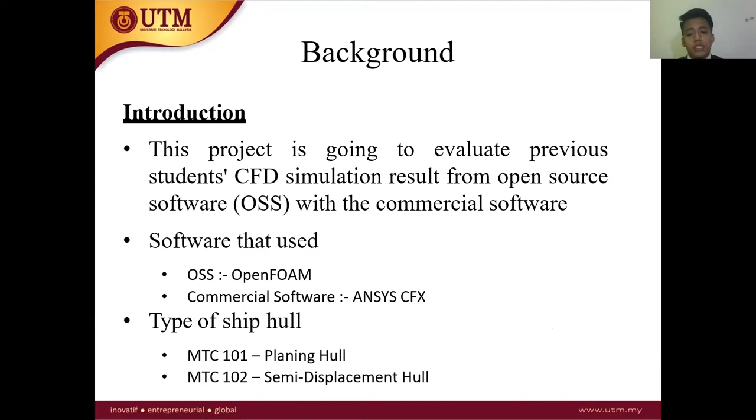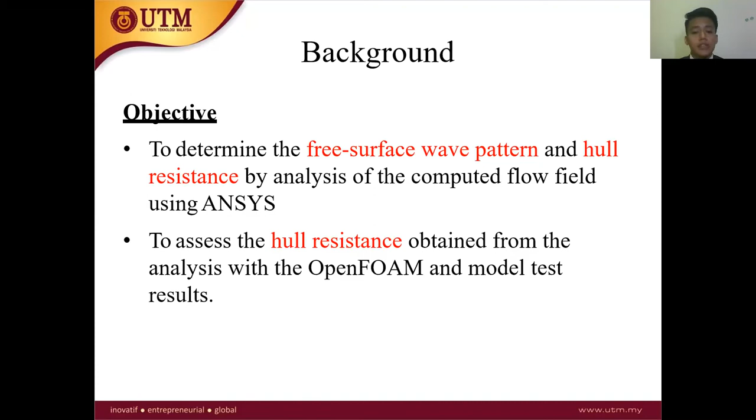The objective is to determine the free surface wave pattern and hull resistance by analyzing the computed flow field using ANSYS CFX, and to assess the hull resistance obtained from the analysis with OpenFOAM and the model test result.

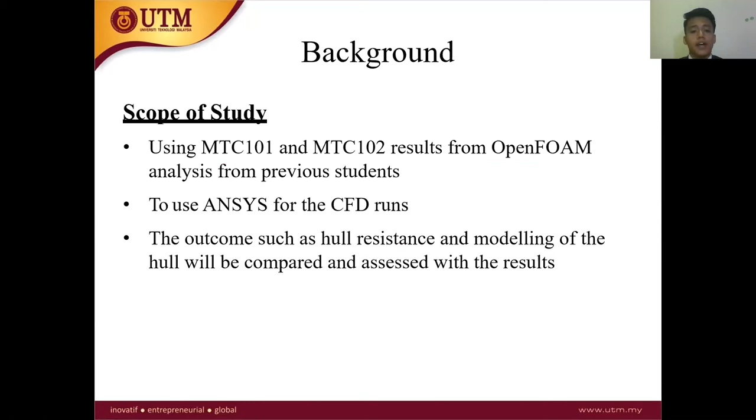My scope of study covers using MTC101 and MTC102 results from OpenFOAM analysis from the previous student, to use ANSYS CFX for the CFD run. The outcomes such as hull resistance and modeling of the hull will be compared and assessed with the result.

The problem statement is firstly, what is the better platform of software to make an analysis of free surface wave pattern and hull resistance, either commercial software or open source software. Second, how much is the difference in terms of accuracy between commercial software and open source software.

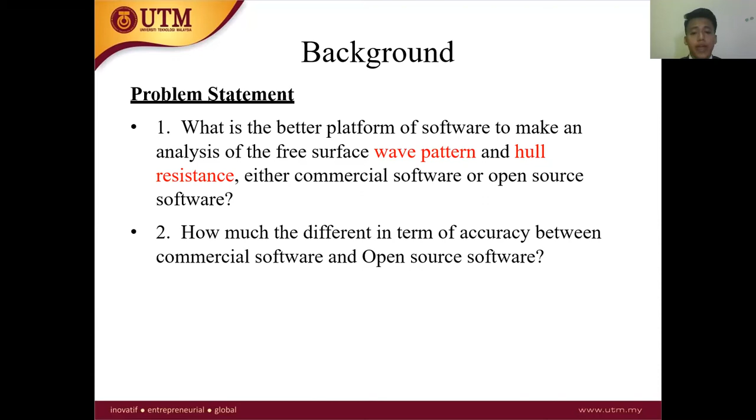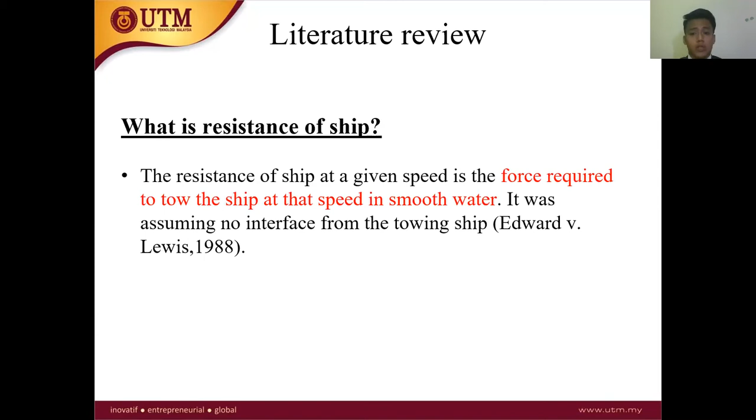In the literature review, I'm focusing on the resistance of the ship. In short, resistance of the ship is the force required to tow the ship at a speed in smooth water, assumed with no interference from the towing ship. This was stated by Edward Lewis in 1988.

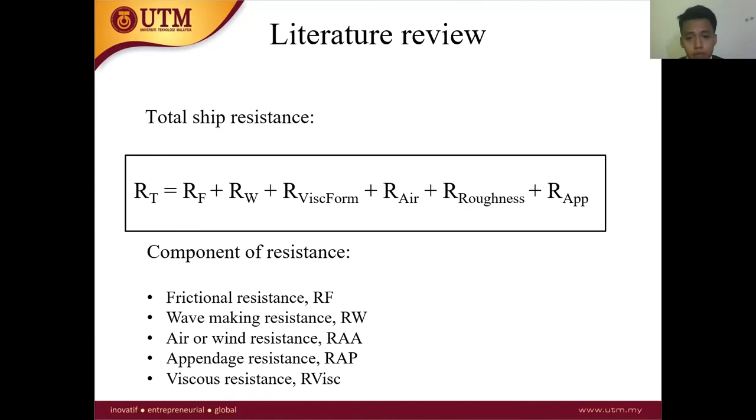In conclusion, the total ship resistance is equal to frictional resistance, wave-making resistance, air or wind resistance, appendage resistance, viscous resistance, and roughness resistance. Okay, this is the type of hull.

MTC101 is placed on the left-hand side, which is a planing hull, while MTC102 is a semi-displacement hull in the middle.

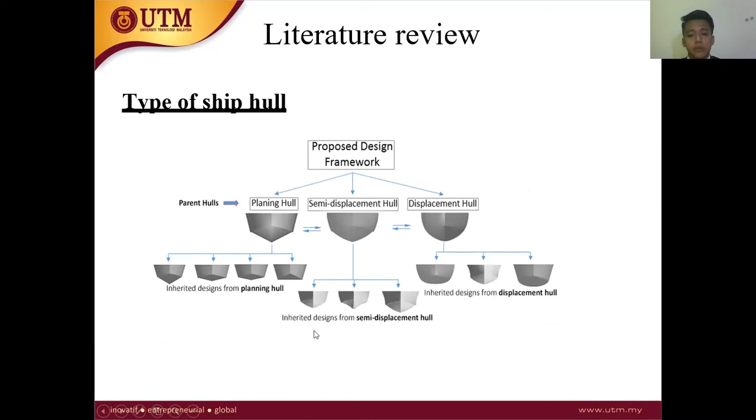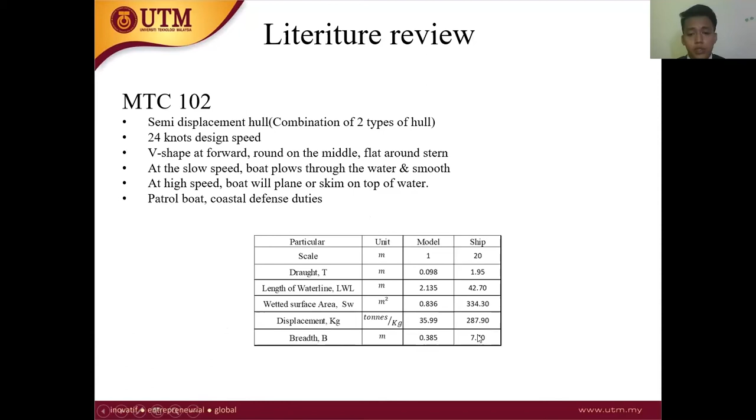The theory of the software, the governing equation in ANSYS CFX that I'm using, is the Navier-Stokes equation, which is a closure problem. This describes how the velocity, pressure, temperature, and density of a moving fluid are related.

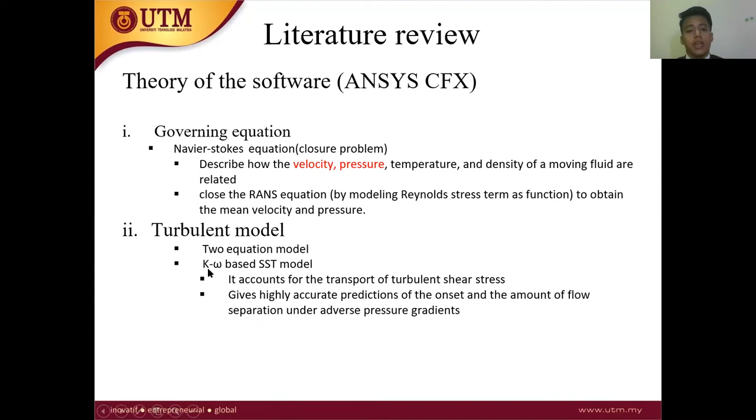However, for the turbulence model, I'm using a two-equation model, the K-omega based SST model. For the K-omega SST model, a formula is needed, and the value will be inserted into the solution part in ANSYS CFX.

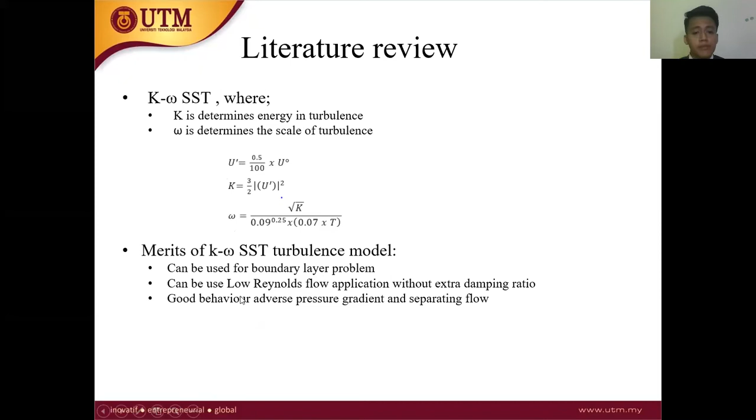K is the energy in turbulence while omega is the scale of turbulence. The merit of K-omega SST is it can be used for boundary layer problems and low Reynolds flow applications without extra damping ratio.

Okay, moving fast. The type of simulation I'm using is steady state and rigid body solution.

In a steady state, the characteristics of the domain do not change with time, and the steady state condition is assumed to have been reached after a long period of time.

In the rigid body solution, to determine the motion of a rigid body, a solid object moves through a fluid without deforming, by fluid force and torque or any external force acting on it.

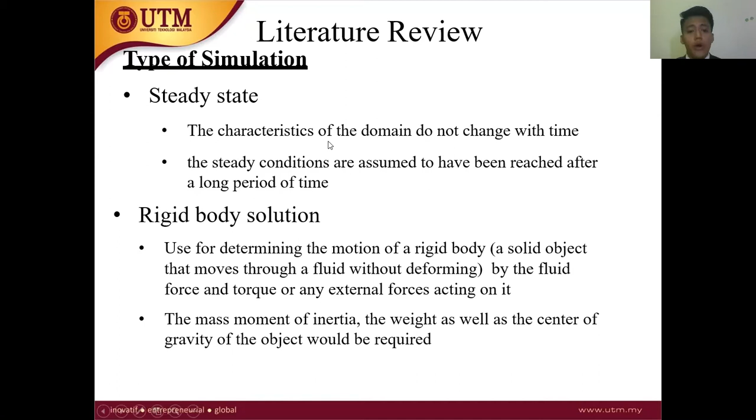This is computational fluid dynamics, in short CFD. This analyzes the characteristics of fluid by using a computer. We have two types in general, which is open source software and commercial software.

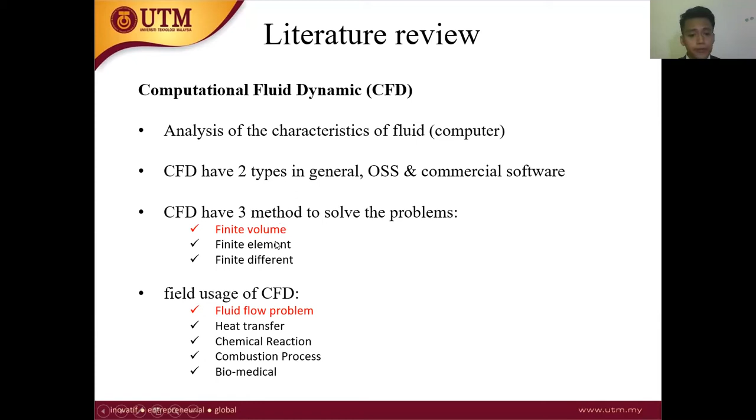In my case, I'm using the method to solve my problem by finite volume, and the field usage of CFD is fluid flow problems. This is the advantage of using CFD.

Moving on to the CFD flowchart. Firstly, pre-processing is a very important part because it includes the modeling part and meshing. The solver is also important, where you need to set what the equation is and how the fluid is moving in your mesh. For post-processing, this is the result of your simulation run.

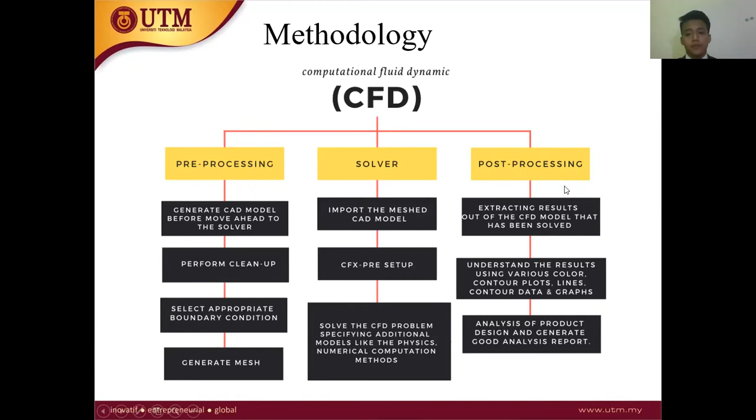For this overall flowchart in the simulation, I will repeat it again. Firstly, we need to remodel the model using any software, but I'm using Rhinoceros to model the MTC101 and MTC102. After remodeling the shape, check the hydrostatic particulars with the experimental data.

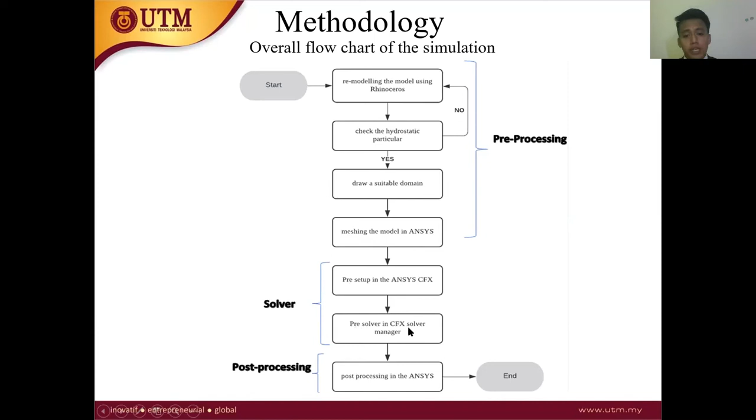After the validation is done, draw a suitable domain, mesh the model, analyze it, pre-setup in ANSYS CFX, pre-solver in CFX Solver Manager, and post-processing in ANSYS.

This is ANSYS CFX. You have the meshing part here, setup, and the solution.

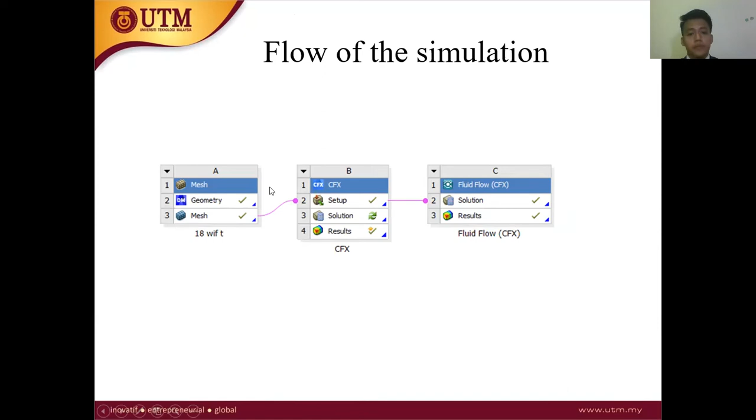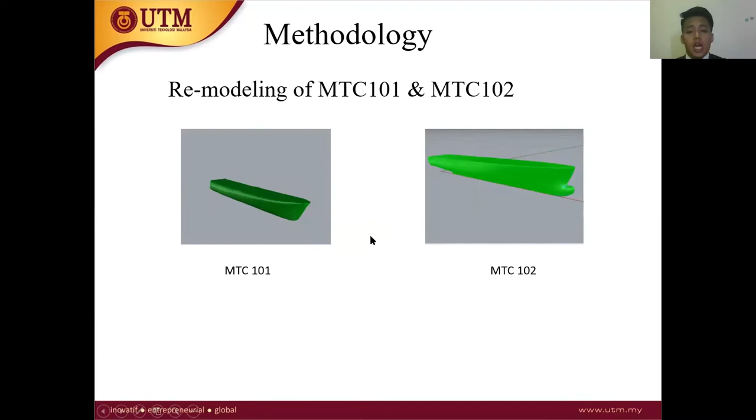Lastly, the result. This is the result for MTC101 and 102 remodeling in Rhinoceros. After that, you need to check the percentage error of your modeling.

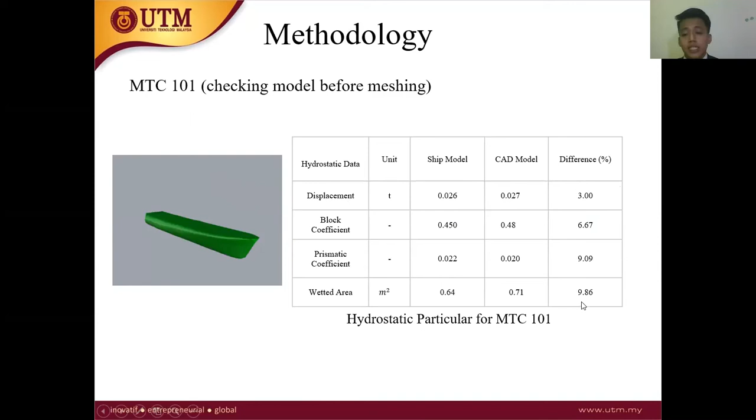Okay, for my modeling, I have done below 10%, and for MTC 102, also below 10%. Next, I will go on to draw a domain.

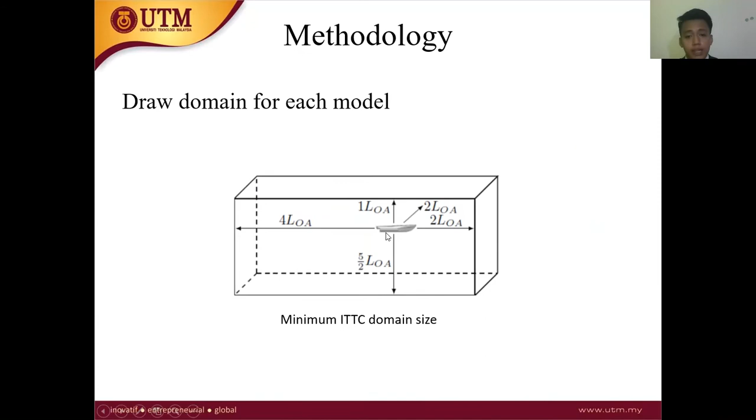For the domain, you need to follow the ITTC recommended sizing, where you put your model position. After that, in the domain, you need to set the inflow of water, the outflow, the top wall, bottom wall, and the free surface. You need to determine these by yourself.

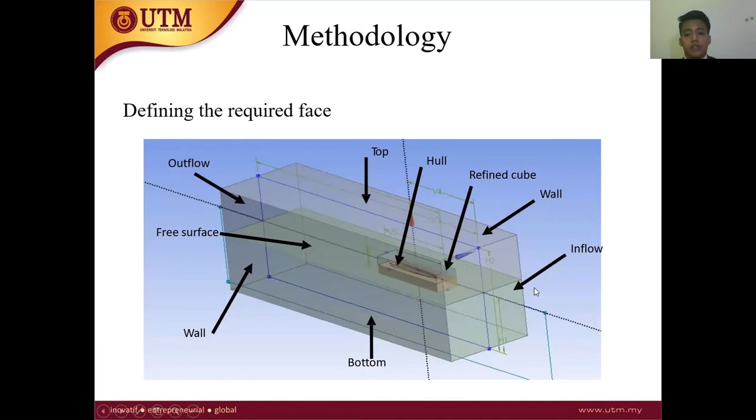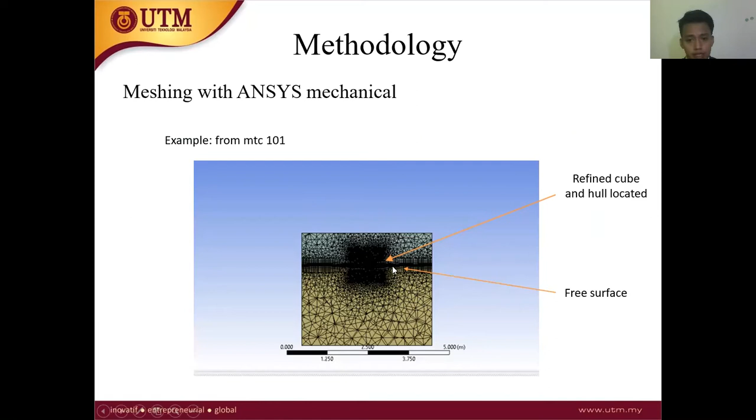This is the example of meshing. For MTC 101, you can see in the middle the cubic, refined cubic, and hull which locate, and at the straight line is the free surface area.

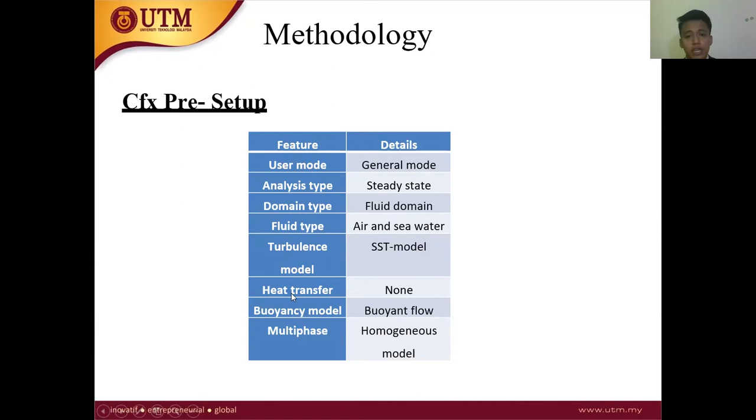This is my CFX pre-setup. User mode, general mode, analysis type steady state, domain type, fluid type water, turbulent model SST model, heat transfer none, buoyancy model buoyant flow, and homogeneous model. The boundary condition is as you can see like this.

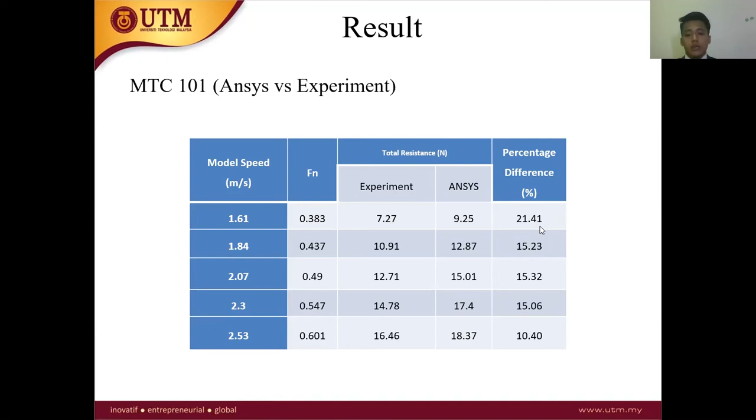So we're going to discuss the result for MTC 101 ANSYS versus experiment. As you can see for overall, the percentage difference at different speeds is very high for me because this run does not take consideration of trim angle. Trim angle is important because the experiment was done with trim angle, so all the percentage differences are quite far.

However, I have tried to apply mesh analysis in my result. By using the coarse mesh at the same speed, coarse mesh gives 22.15%, while the fine mesh gives a lower percentage difference. This means we need to make the meshing very fine to get a low percentage difference, however it takes too long a time.

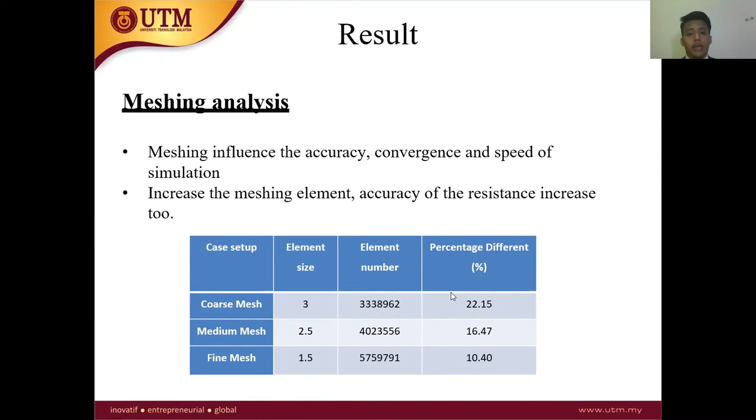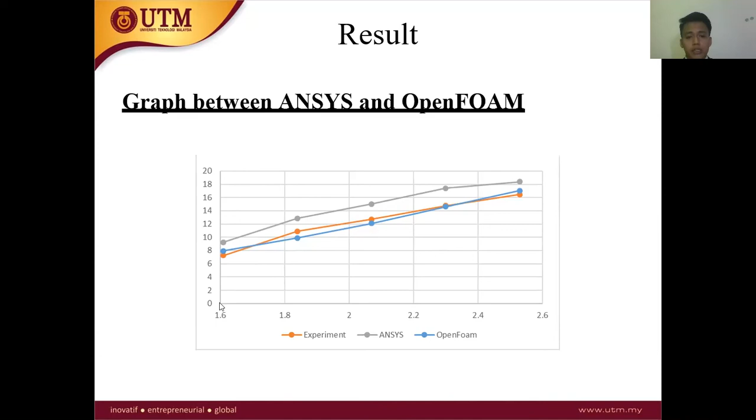This is the graph comparison between the three: experiment, ANSYS, and OpenFOAM. The Y axis is resistance and this is the speed.

So the discussion is the trend line of ANSYS is similar to OpenFOAM at untrimmed condition. The ANSYS result is quite different from the experiment result compared to OpenFOAM. ANSYS produces much bigger resistance compared to OpenFOAM. This is because the condition of trim angle is not included in the simulation setup.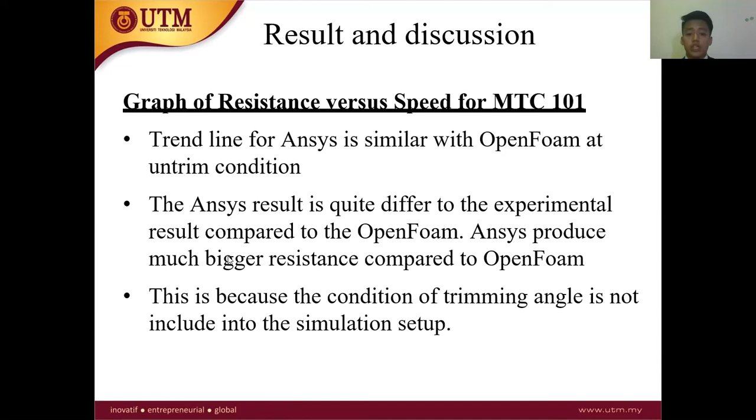So this is the result for MTC101. You can see at different speeds, the wavelength from Ansys is bigger compared to the wavelength from OpenFOAM.

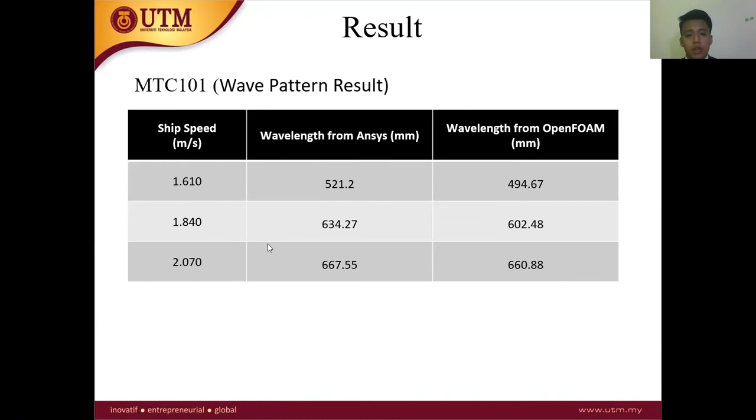The wavelength is much bigger than the OpenFOAM result. When the speed is increased, the wavelength also increases. The wave height also increases as the speed increases.

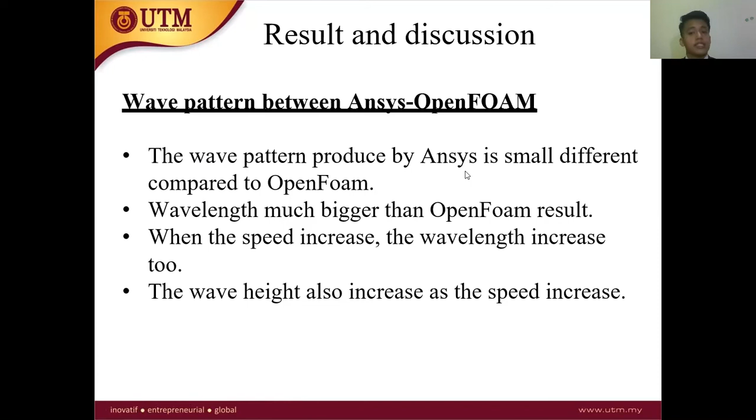Next, we move to the result for MTC102 Ansys versus experiment. In this result, you can see there is a small percentage difference compared to MTC101 because in MTC102 I have applied the trimming angle.

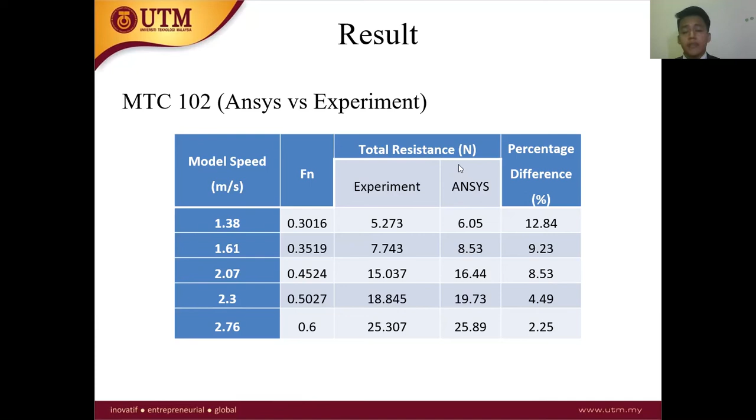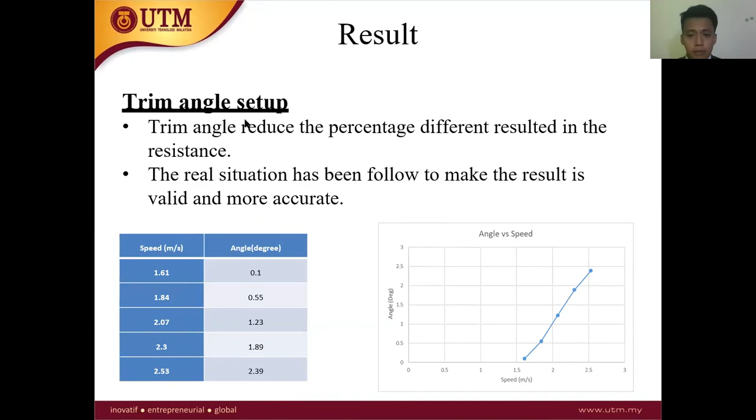So this is the trimming angle setup. I get the data from the MTC. Okay, the result for Ansys.

The result between Ansys and OpenFOAM, as you can see, the percentage error at lower speed, Ansys gives 12.84% difference. However, the percentage error for OpenFOAM is 10.05%.

But at higher speed, the percentage error is 2.25% for Ansys. For OpenFOAM, the percentage error is 8.45%. This means that Ansys gives a better result when the ship is moving faster, so the average is also smaller compared to OpenFOAM.

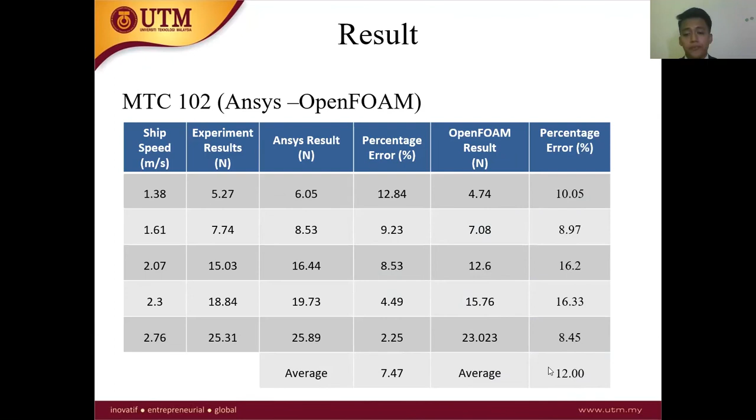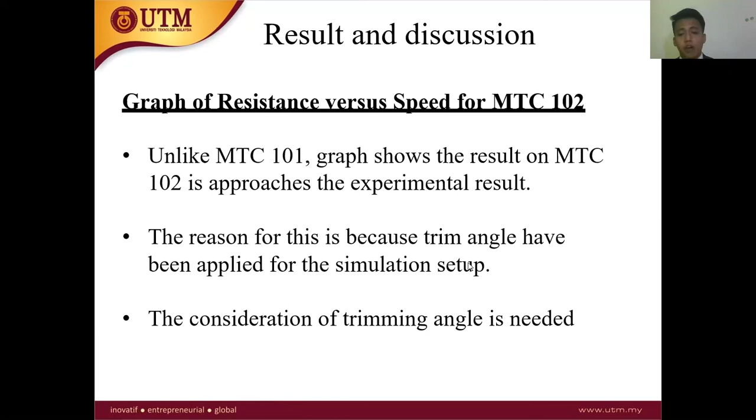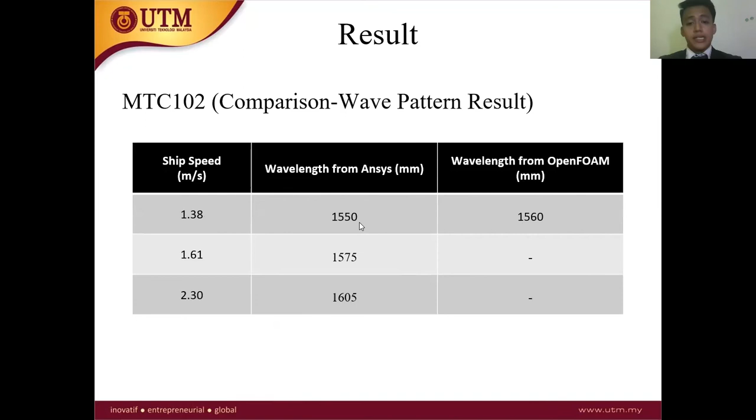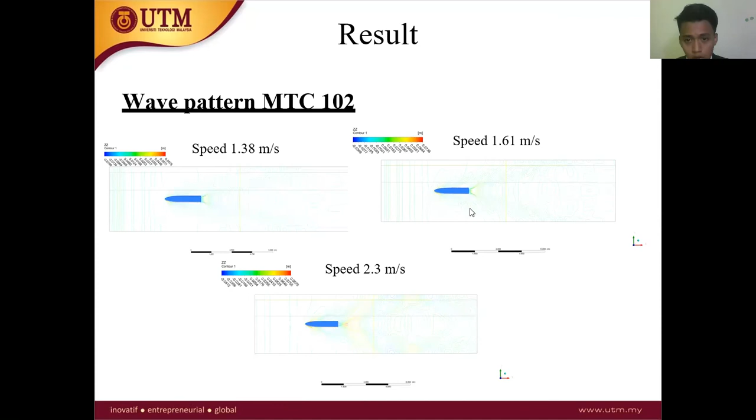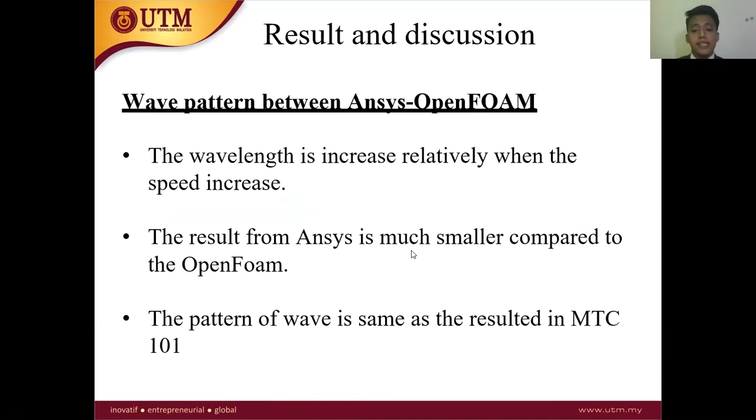As you can see, a different preview of wave pattern is applied. The discussion is the wavelength increases relatively when the speed is increased. The result from Ansys is much smaller compared to OpenFOAM, and lastly, the pattern of wave is the same as the result in MTC101.

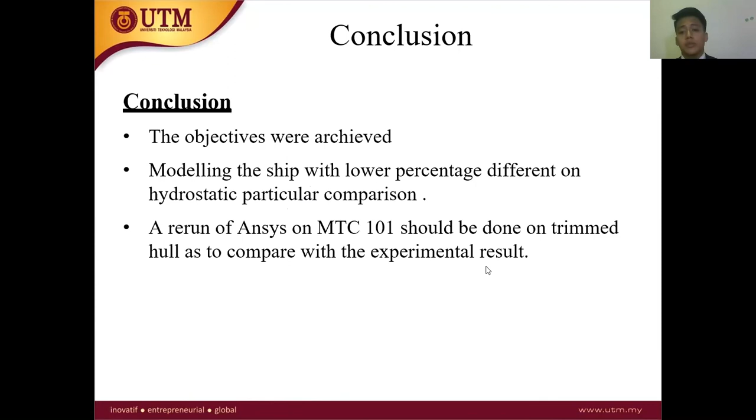A rerun of Ansys on MTC101 should be done on the trimmed hull to compare with the experimental result. And this is my reference, and thank you very much.